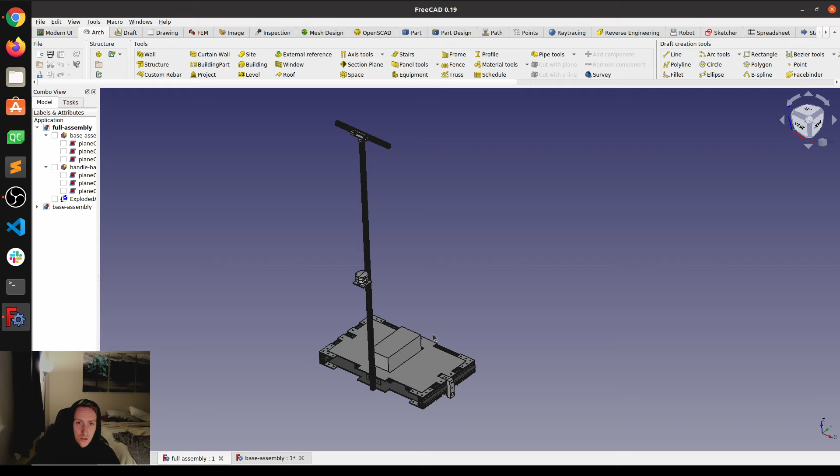Alright, so we are in FreeCAD, and we have the full assembly right here. So what you have is basically two parts: you've got the base module, which is going to be all the electronics, the battery, the drive motor, which I'll get into in a second, and then you've got this handlebar. Now the key takeaway with this is that everything was done, hopefully, with off-the-shelf components. I wanted to make sure anyone could buy these parts with really no limitation on access.

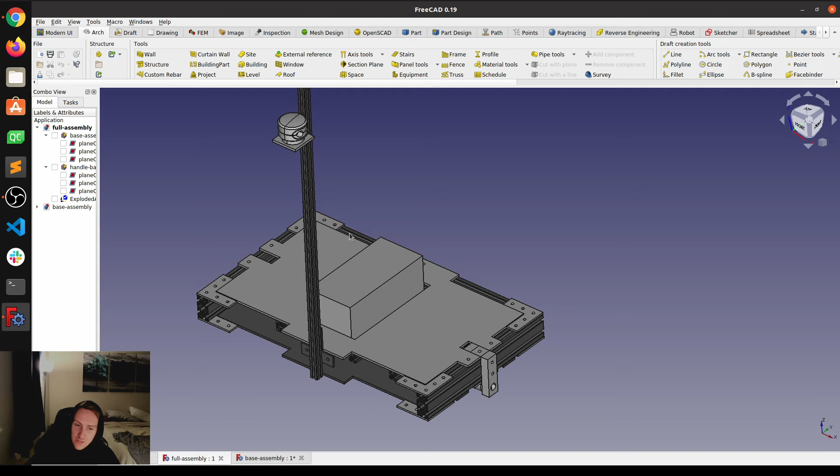So everything's done with either 3060 aluminum extrusion or 2020 aluminum extrusion. For the actual handlebar assembly, it's 2020 aluminum extrusion. The first thing you'll notice on the handlebar assembly is the actual Lidar—if we take a look here, it's the Sweep Lidar, which I mentioned earlier.

And it's super easy to use with multiple different software packages. The one we'll be using, obviously, is the ROS software navigation stack, and it's basically plug and play—about 4 clicks gets you up and running. Highly encourage you to take a look at this. I'm not actually sure about their current availability, given this is kind of an old Kickstarter, but I'll leave a link in the description below for this site, and you can take a look at their videos and maybe get one for yourself to play with.

They're really exciting. Then moving up the chain, we've got the Intel RealSense camera. Now this is the depth camera that also incorporates an IMU for tracking. I'll leave a link to the site itself as well.

A bunch of different varieties of cameras. They even got their own LiDAR system. This one, though, in particular, offers onboard SLAM if we want to try that.

So I want to incorporate a system that has redundancy for the Segway, and I think using its onboard SLAM might be a cool feature set in addition to the ROS SLAM.

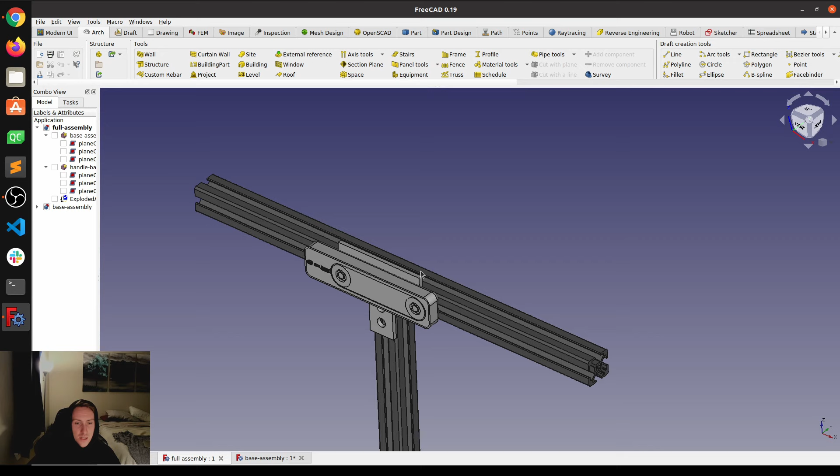You'll notice that I put it up top where the actual hands would go for the handlebar. The reason for this is really just the field of view. I want to make sure that as I move forward, I have a really good full view of my environment that I can do some more computer vision stuff with. I've got a few ideas for how I want to use this entire robotic platform beyond just the SLAM approach, and having it up top is really going to help a lot.

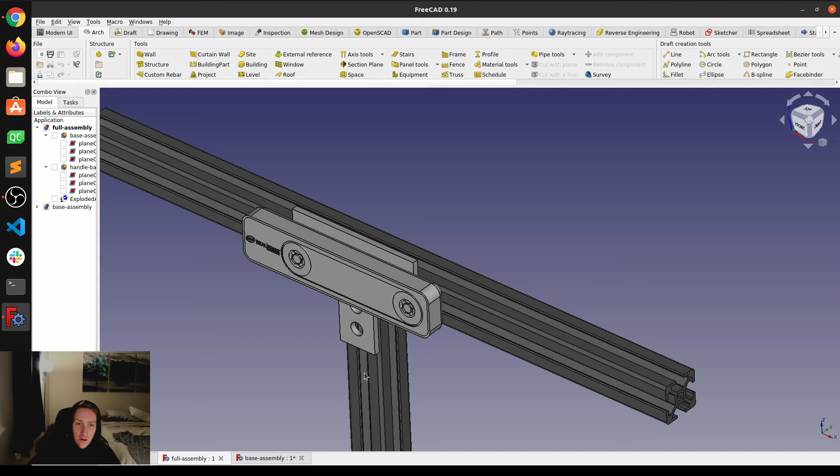Some systems will have cameras down at the ground, and this is if you have really precise requirements on collision, or if you want to make sure that you're not falling off a step or a curb. For me, I'm willing to take some of that inherent risk to actually have a better understanding of my overall farther out surroundings, particularly with computer vision approaches for things like line detection, or if I want to run some machine learning on this, it'll be fun to have it there.

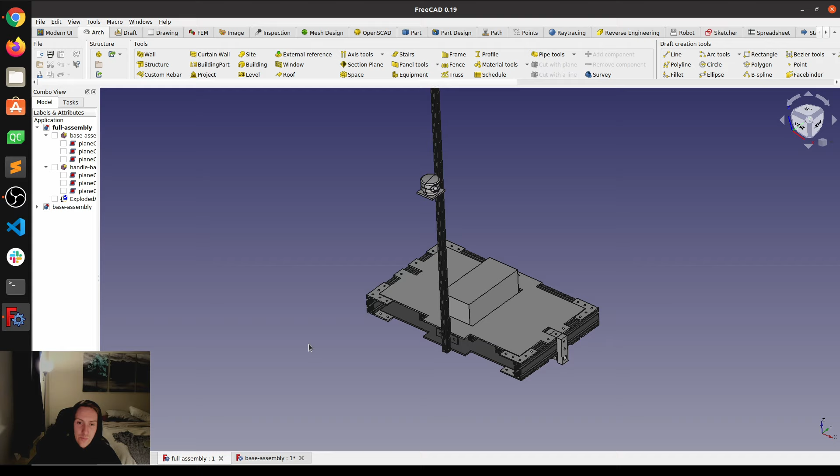Circling back to position on the LiDAR, you'll notice that I had it kind of halfway up the handlebar. This is important because when I actually do the SLAM, I'm going to have to build a map. And in building the map, if I had it too close to the ground, I'm really only covering the bottom, maybe a foot of actual environment, and that can be fairly dynamic. Oftentimes you have chairs, table legs, people even in that area. By having it farther up, ideally, I'm hitting kind of midsection on the wall, which should be a far more stable and static environment to map.

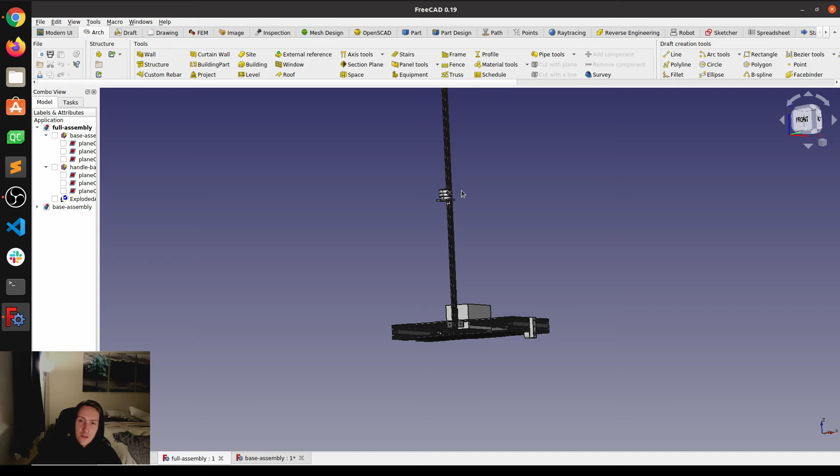That being said, since I'm using aluminum extrusion, I designed this system to be adjustable. If I want to move the height of either of these sensors, the only thing I should have to do is unscrew these and lift them up or down, and then just adjust their position in the transformation config, which will live on the ROS stack, so the actual computer and ROS knows where the sensors actually exist relative to the Segway sensor.

If we actually now go to the base assembly, which is really the meat and potatoes of this entire project, let's start breaking this down piece by piece. The first thing you'll notice is I've got a representation of that 10-inch wheel. So this guy actually is what will mount on top of the hoverboard motor.

The hoverboard motor you can see here is a representation without its tire, and the actual construction of these in real life will be in a future video where I show you drilling through the actual frame right here, or rather the casing, and attaching that larger wheel.

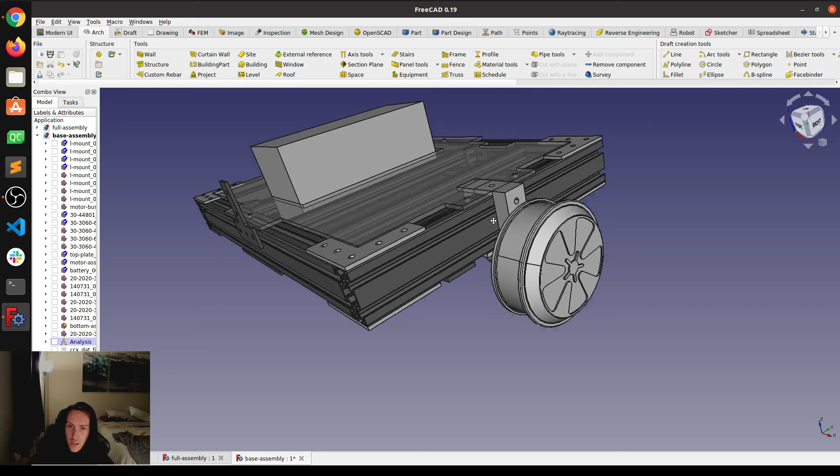And then while we're at the motor, really one of the more critical parts that I want to highlight is the fact that I've got this motor mount situation going on here. Now this motor mount, I don't have a mill. I don't have a mill that can actually mill these guys in these unique shapes.

So instead what I'm going to try is printing these with high density. Now I really don't have high hopes for that. I kind of anticipate that it will break and fail, and I'll be having to redesign a motor mount that I'll actually be able to mill. That's my assumption. But because I already designed this, and if I can keep it without having to use a CNC, it'd be more accessible to people, I'm going to give it a shot. So either it works and you see success, or it fails and you'll see it fail. Either way, you will see the end result.

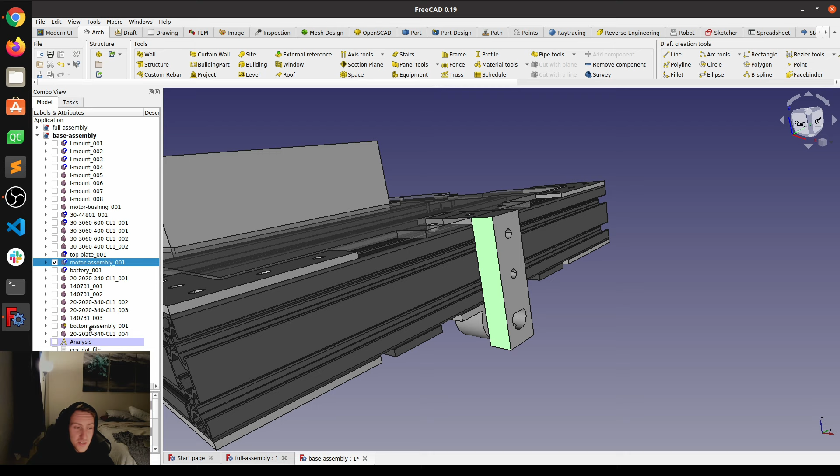I did run an actual simulation on this, and you can see I basically simulated the Newton forces going down and up on the motor of an average person, specifically my weight, and you can see it actually deforms a lot. This is with ABS as the material choice.

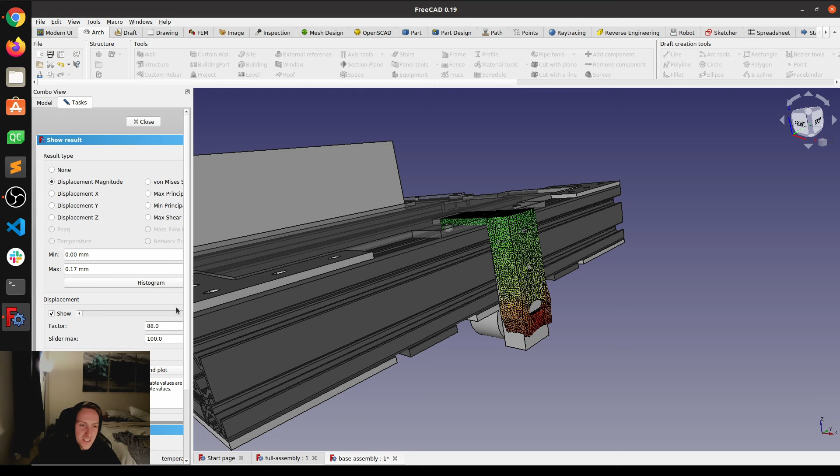I'm assuming it's going to break, and then I'll have some issues, because depending on how I print it, it will likely shatter along the actual print lines, as opposed to just deforming the way a solid chunk of plastic would. But either way, we'll give it a shot.

Moving on to the next thing, this battery. What you're seeing is a representation of the battery I'll be building, a 10S4P battery, constructed with a battery kit from this place, whose name I'm not even going to try to pronounce. The really cool part about this kit is that it's solderless and spot weldless, so you don't need any equipment to construct your battery pack. They all go together with these screw terminals.

In addition to these plastic pieces and screw terminals, you can also get the battery management system and some heat shrink covering to keep it all protected from the elements, which will be really nice. I'm going to put it in an actual project enclosure as well, but the construction of this will be in a future video, and I'm very excited about that. That's going to make the electronics way easier to do.

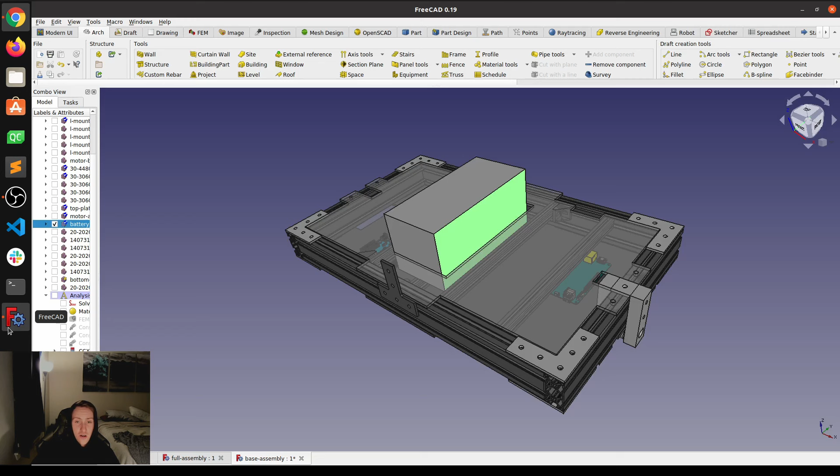If I remove that, the next thing you'll see is this top plate, and you'll notice it's transparent. That's intentional. My game plan is to do a plexiglass cutout on a laser cutter, and hopefully that'll support the weight.

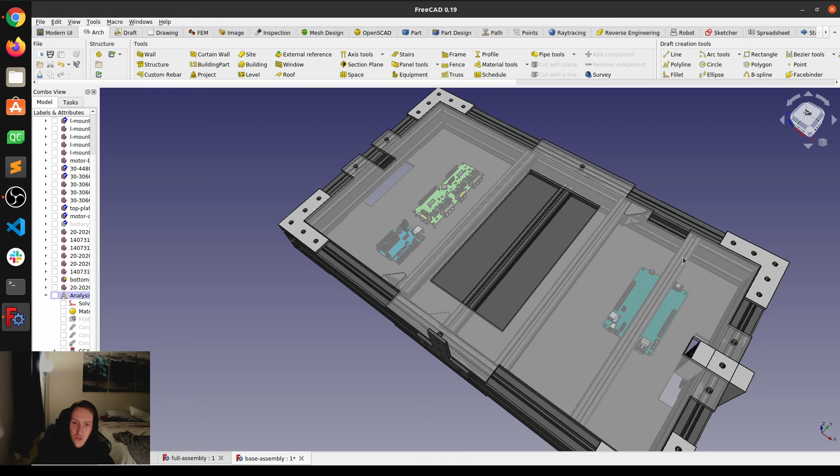I've got these support rods here, 2020 extrusion, just feeding into the 3060. Nothing fancy there - if you've ever done a 3D printer, this will be a pretty similar technique in construction. But the idea is that I really want something where you could actually see what's going on. I wanted to make this visually appealing, and I think by having it transparent, I'll accomplish that, as long as it can support the weight of standing on it.

If I go ahead and remove this, we can get down into it a little deeper. Like I said, we've got this 2020 extrusion support, and below that, if I do a top view, I've actually got 4 main electronics in here.

The first being this Odrive, which I mentioned a little bit earlier. Odrive is an open source brushless motor controller. This thing is insane - for its price, I haven't found even a remote competitor. It lets you do 4 different types of control.

You either have a go-to position, which is pretty much doing trajectory planning, or you have just a dummy position command, velocity command, or torque command. For us, we'll be doing velocity, obviously, since a Segway is essentially just a vehicle that balances, trying to keep the center point underneath itself through different velocities, either forward or backwards.

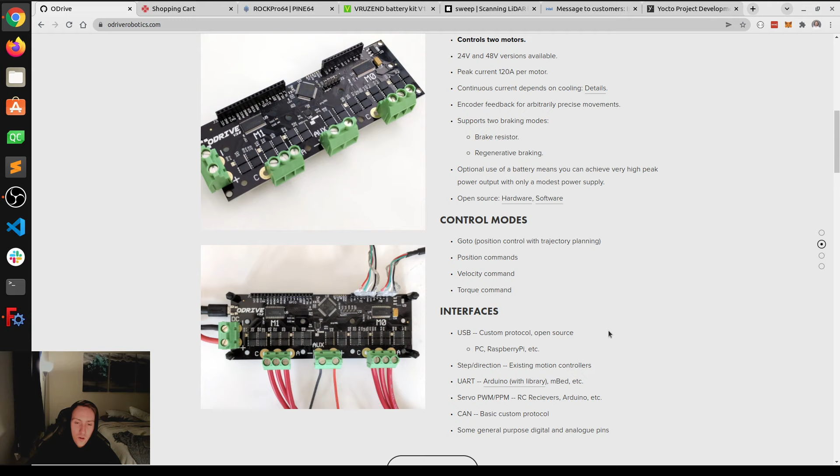One of the exceedingly cool parts about this is its multiple control interfaces. I'm going to ideally be using the CAN interface, and this interface lets you do a whole bunch of connections on essentially a single bus. It's what your cars use, and it's super popular. When done right, it's super stable.

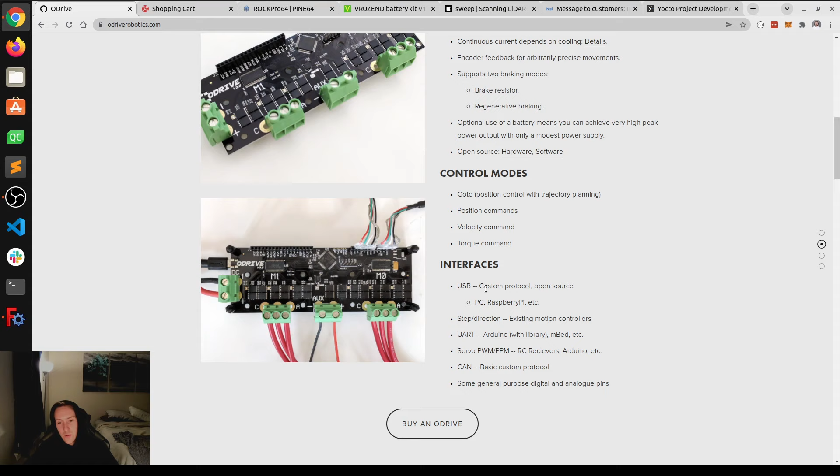If that fails, if I have some complications with that, I'll probably default back to UART or USB. Super simple - this single board can drive 2 motors, as it shows here. I think each one has a peak of 120 amps, and a stable rating of about 40, which is well within the range of the hoverboard motor.

Coming back over here, we've got a regular Arduino. This Arduino is really just there to support the Adafruit IMU. I'll put a link in the description below for the exact model I'm using. This board is actually super off the shelf and super common.

Really nice board, very good results for how cheap it is. The main point of this IMU is to support the PID loop that will process the self-balancing algorithm.

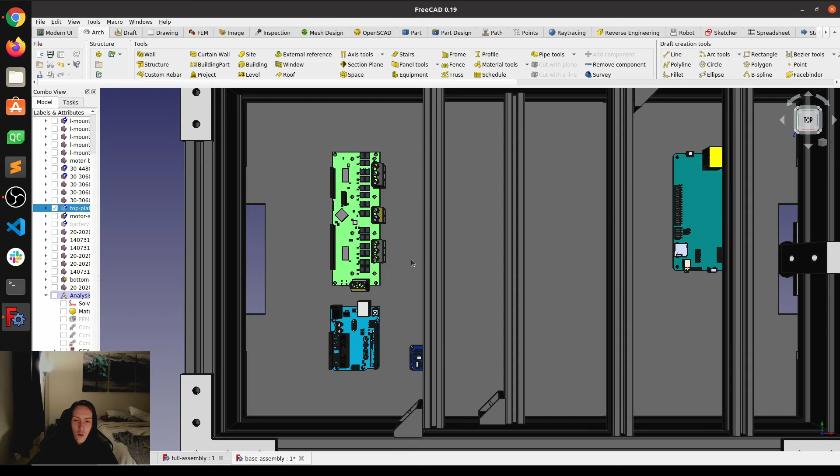I'm also hoping to incorporate this IMU feed into the SLAM navigation stack in addition to the Intel RealSense's IMU. It's always good to have more sensor data rather than less, and if I can incorporate both of these, perhaps through a Kalman filter, I think I'm going to get significantly better results than if I just used a single one.

The last and final piece is the actual brains of the operation. This is the Pine 64, specifically the Rock Pro 64. Pine 64, as I mentioned earlier, is an amazing company that offers a whole bunch of different devices. You can see here they've got a huge selection of single board computers. They also do laptops, phones, and they have an awesome smartwatch, which runs FreeRTOS, a real-time operating system.

It partners with a GUI on top of that to make a really cool, I think $25 smartwatch. I've got a project working on that guy that's going to be a future video. If you want to see more about this, make sure you subscribe so you can get notified when that comes out. They also do little compute modules, and they even support a cluster board, soldering irons.

This company is insane. The reason I'm going with the Rock Pro is I've got a couple of them, and I've stress tested them to see that they could actually support what we're trying to do here. You can see some of their overall specs with their processor, the RAM, and the different kinds of interfaces. They do run eMMC, which is cool, and that's what we're going to use to boot as opposed to SD.

If you look at some of the other devices, they kind of all vary, mainly just on their processor and some of their RAM. This A64 LTS is one I have a bunch of, and you can notice it's got 2 GB RAM, a different processor, the A64. It's an amazing computer, and honestly, as soon as I found them, I moved away from Raspberry Pi. They will do just about everything.

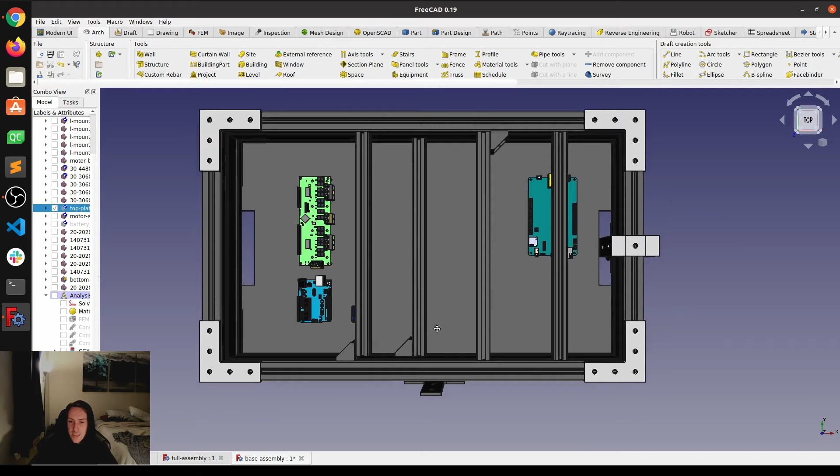And then you've got the base plate. The only other cool thing about the base plate is that it is designed to support, it's going to be plexiglass, and all the hole mounting is done with just threaded inserts. They'll be melt-in threaded inserts, I think supporting 2.5 millimeter screws.

The idea here is that I think I've gotten this layout pretty much how I want it, but anything on this entire platform, whether it's the handlebars or the actual mounting of the rails, I wanted to make sure I could adjust on the go or make more customized as I add more features and find new uses for the robotic platform, which currently is going to be a Segway, but could be much, much more.

The idea is that I could just either take it to a drill press or manually drill out holes that are the rough diameter of the threaded inserts without having to be perfect, and then just melt them in like I normally would.

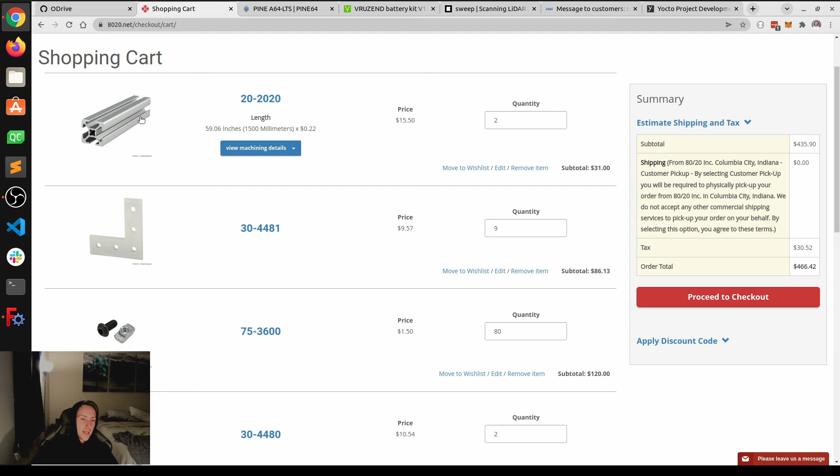With that said, let's take a look here at some of the aluminum extrusion. I'll be getting this from 8020.net. It's a super great supplier, really cheap for a lot of this stuff. I'll be using standard 2020, then I've got some L bracket. Everything's going to be put together with T-nuts, using I think 6 millimeter screws.

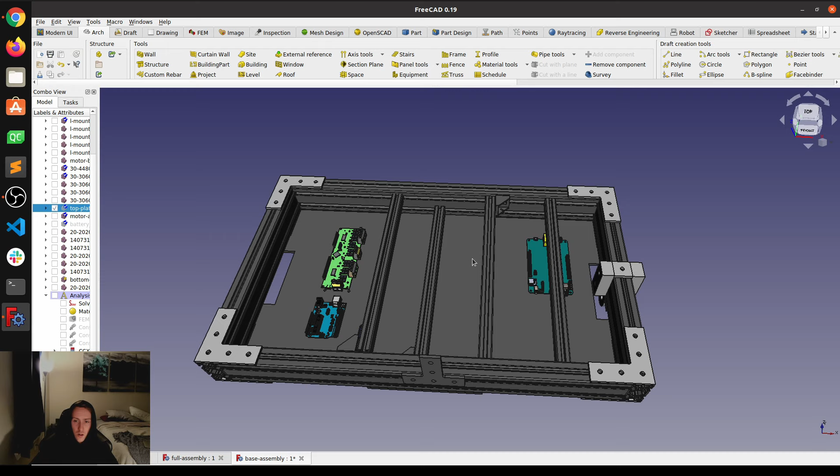Then I've got the T-bracket for the conversion from 30 millimeter to the 20 millimeter handlebar, and a couple angle pieces used for the actual support 2020, and then really just the 3060. You can see it's nothing super expensive. You can really customize on length, so I can get just exactly what I want. I'm pretty excited about all of this, it's going to be a really fun project.

So the idea of this entire system is that it's modular. I really want to make sure that if you wanted to work on it, you didn't have to go out of your way to take it half apart or all the way apart to work on the electronics, adjust the wiring, change software, any of that. I really believe that you shouldn't sacrifice workability for spacing of the components.

I've been involved with a few projects like that where basically you try to get everything really compact, but it hurts you if you ever have to take it apart and work on it. A perfect example is the iPhone, right? You have this super compact, really awesome system, but if you ever try to get in there and actually work on anything, it's going to be a nightmare. For something like this, especially an independent project, I really believe that you should just give yourself more space than you think you'll ever need, because you'll probably fill it up.

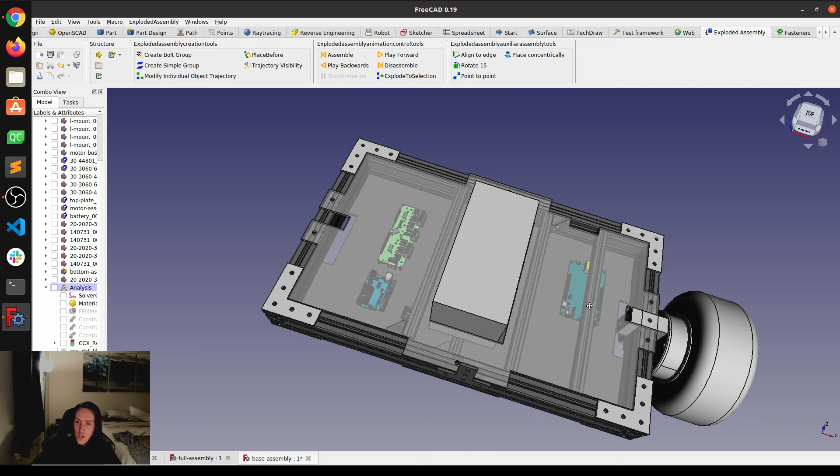So if you take a look here at the assembly, if I run the exploded view on this, what you'll see is kind of how I expect it to come together and take apart. Everything should be separate. One of the big keys is that if you take this top plate off, the goal is that you have full access to all the electronics.

This motor connector, along with on the handlebar, the actual Lidar, and the RealSense camera, I plan on having all feed to essentially a central connector hub. This connector hub is going to live on the actual base plate, and then from there get wired to all the correct electronics and correct boards.

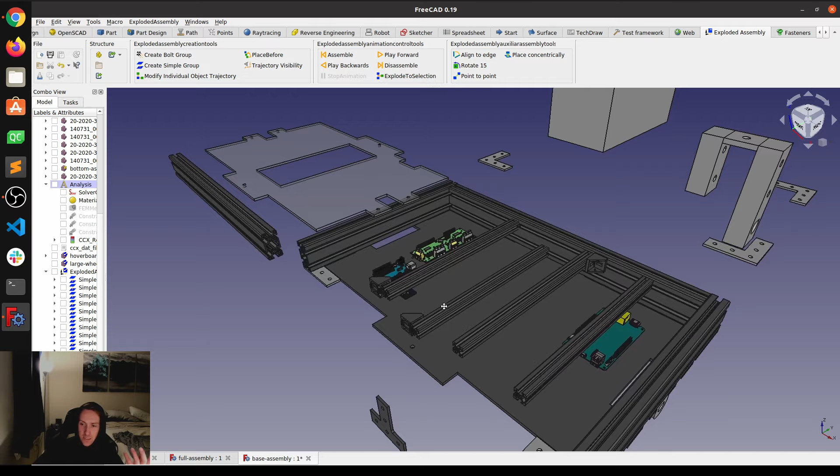That means that if I wanted to just take this entire bottom plate out and work on the electronics individually, I should be able to. I should be able to have this completely separate from the system and have it go together super easily without having to take apart the entire rest of the Segway.

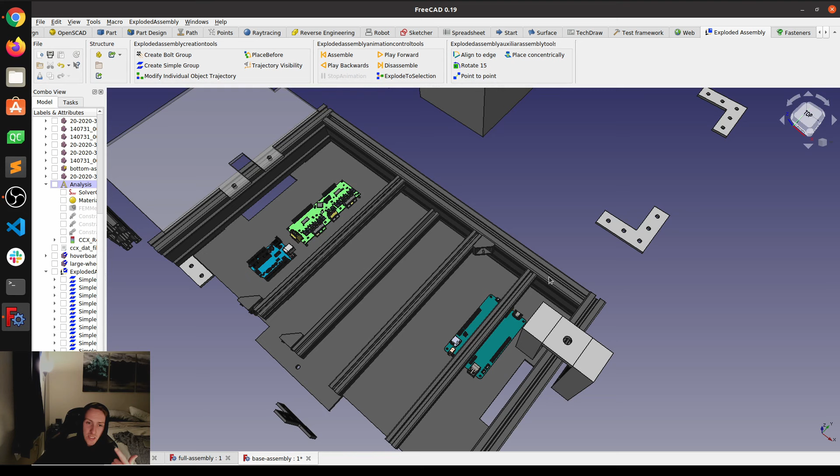That is going to let me dev in cycles. I'm not going to have to get everything done right away as I put it together. I'm going to essentially be able to put this whole thing together, then work on the tuning, then work on the actual ROS navigation stack, work on computer vision, get all that done separately while being able to still easily access all the electronics. So that's the goal.

I'm looking forward to this project, and hopefully in the next video we're going to order these parts and actually get assembling, get building. So by the end of the next video, we should have the full actual frame of the Segway put together.